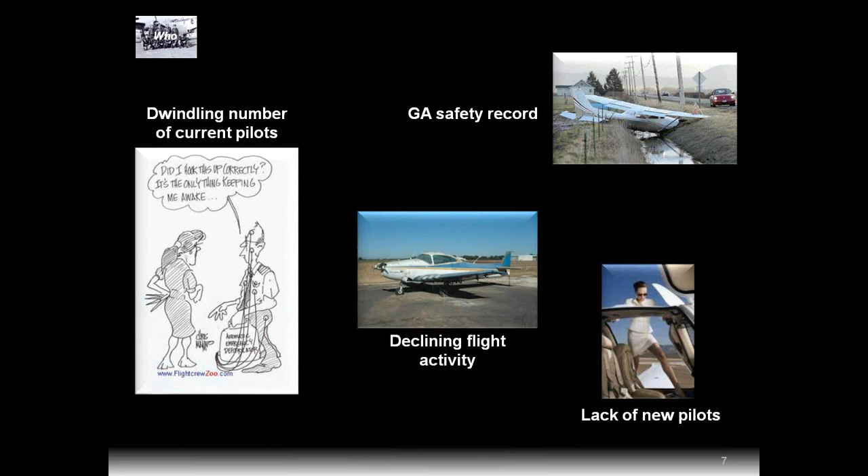Also, a major challenge, we believe, is the dwindling number of current pilots. As you all know, I've been in this game a long time, and a lot of the other folks involved in this have been in aviation a long time, and that just means that we're starting to drop out now for various reasons. And other factors have come into play that have been reducing the pilot population. In fact, I think this cartoon kind of says it all when it comes to the aging pilot population, just not flying as much. We'll look at some numbers here in a second. And of course, the declining flight activity overall in general aviation is a major challenge that we're facing.

The Aerospace Trust has put together a team that's attacking this problem along with the Trust. And part of the team is the FAA Wings program. Also Southern Illinois University Carbondale, as you probably know, they're in the Big 5, if you will, for university aviation programs. They're involved with some aspects of the initiative. Lewis University here in the Chicago area, also in the Big 5 aviation universities. Kishwaukee College, the only junior college in the area that has an aviation program. They're a co-sponsor and one of our partners. The Chicago chapter of Women in Aviation International. Compass Consulting.

Compass Consulting is a team of very experienced aviation experts. The leader of that team is Captain Dave Greenberg. Dave is the former founder and CEO of Cargo 360. That's a 747 cargo operation. Before that, Dave was the Chief Operating Officer of Korean Air, and before that he was Senior VP Flight Ops for Delta, and before that he was a Delta line captain, and before that he was an Air Force instructor pilot.

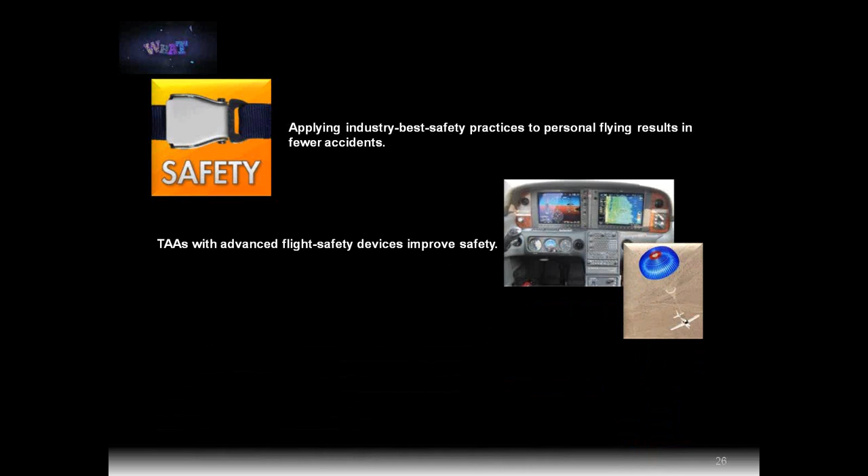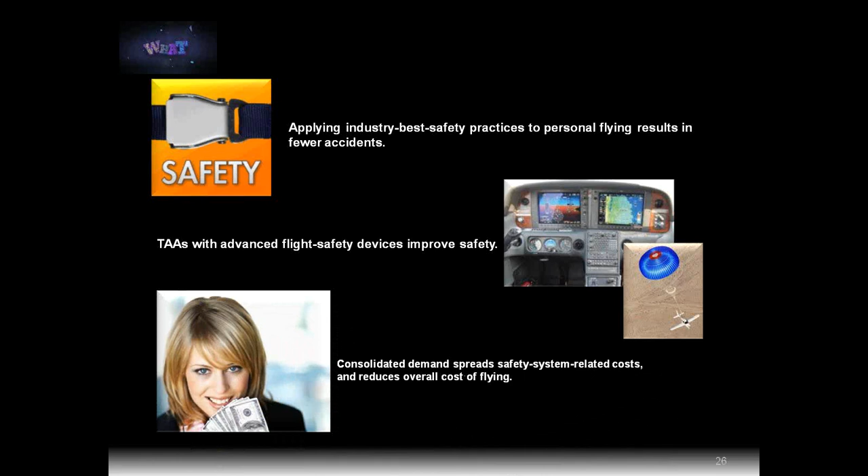Here's what the ADSOD will prove. It'll prove that by applying industry best standards, safety practices to personal flying, we can have many, many fewer accidents, down from that 1,200 a year to just a handful for the people who are flying this way. We believe it will prove that technically advanced aircraft with the advanced flight safety devices will drastically improve safety. We also believe that the ADSOD will prove that consolidating this demand for flying will spread those safety system related costs and reduce the overall cost of flying. So we're going to prove those things, we believe.

We're also going to prove that the number of student starts can be increased to 150,000 a year. Now we're not going to prove that obviously with one ADSOD in Chicago, but when it comes to marketing, if you show that it's scalable, then it's like a test market. So we believe, and we have a lot of marketing guys involved in this, we're all of the same opinion, that if we do this right here in Chicago and document it properly, we'll prove that on a national scale you can get back up to that 150,000 student starts a year.

We also can prove that we can retain 80% instead of losing 80% after they start to learn to fly, and we believe that we can prove that we can turn around the decline in that absolute number of active pilots and make them more active.

But just as importantly, we've got to prove that this ADSOD is a sustainable business model, because you've got to remember the old adage that we've always known about in aviation, especially in personal flying: no bucks equals no Buck Rogers. So this has to work financially. It has to be a sustainable business model.

The FAA isn't going to underwrite it. There's no sugar daddy that I can see that's going to underwrite it. Who could on a national scale? This has got to work as a business model, but we believe it will. So we've got to prove that. All right, let's take a look at the elements of the ADSOD then. What does it really look like?

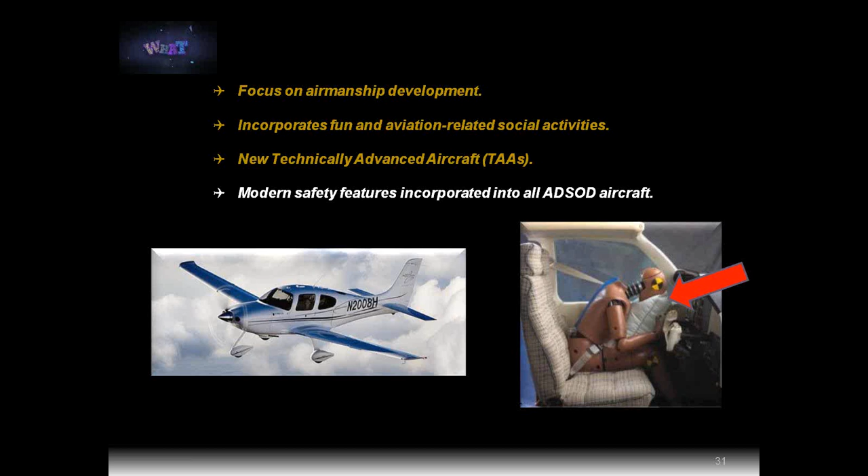So if you're already a pilot like you guys are, and you don't have a lot of tail dragger experience, we'll put you through a tail dragger initial course to where you're good at it, and then you'll have that tail dragger flying in your recurrent training throughout the year, so you maintain those good stick and rudder skills. Otherwise, you'll fly these technically advanced aircraft, Autoflight and all that sort of thing. Every airplane that can have it will have modern safety features like airbags. We'll talk about some of the others.

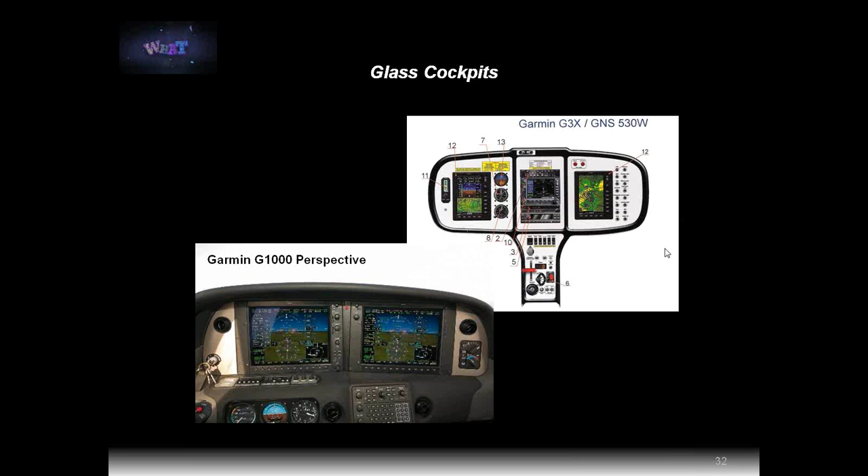All of the airplanes, with the exception of the Champs, the stick and rudder airplanes, as I like to call them, will have glass cockpits. For commonality, we've decided at this point on going Garmin. So in the LSAs, we'll have Garmin G3Xs, and in the Cirrus we'll have the G1000 Perspective system. A lot of commonality in how you operate them and functionality. So it won't be a major hurdle moving between the different airplanes.

All the glass cockpits will have all of the features, so we're not going to cheap out on glass. There are some quote-unquote glass cockpits out there that are essentially EFIS, electronic flight instrumentation systems, that just present the basic six-pack in a different way. But if you really want a glass cockpit, in my opinion, what I call a glass cockpit are systems that have all of these features, like synthetic vision technology.

It looks like the real world out there. XM weather, real-time weather. Terrain awareness warning systems. Traffic alerting systems. I tell you, I flew a corporate airplane, a twin-engine turboprop, Conquest 2, for about 1,500 hours out there in the system. A lot of little airport stuff, of course a lot of controlled airport stuff, but I had a simple Skywatch system in there, traffic alert system, and I felt naked. I feel naked out there without one now.

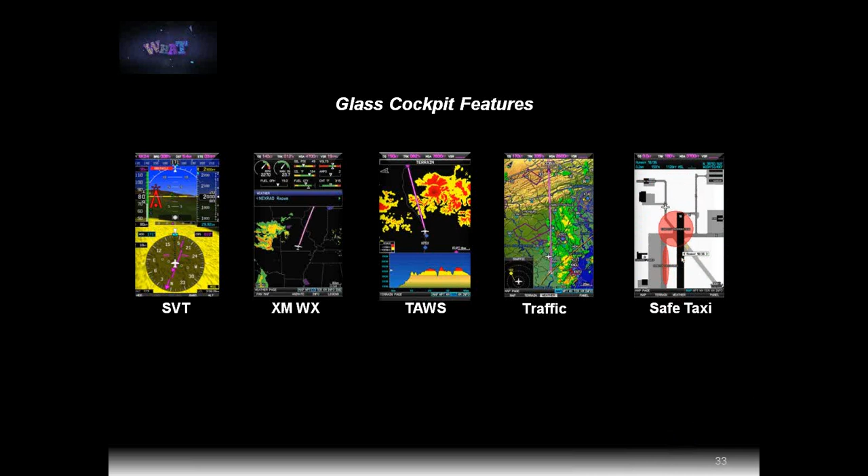They really are an incredible safety enhancing device, and so we'll have them in all the airplanes except for the Champs. And things like SafeTaxi. If you're going to operate at night, especially, or at complex airports or IFR, you've got to have SafeTaxi, but it makes life easier anyhow. So we'll have all these features on the glass cockpits.

You guys have probably heard me mention things like Autoflight. I'm a big believer in Autoflight, as long as you also maintain your stick and rudder skills. But Autoflight is here. It's getting better every day. We're going to see, in my opinion, full auto land within a couple of years. So that means pretty much you keep it going straight with the rudder pedals, rotate with the stick, get it in the air, punch the autopilot on, you fly to where you're going and auto land it. So that's the capability we're going to have.

We have it today from turning on the autopilot right after you get off the ground, till wherever you want to turn it off before landing, usually 50, 100 feet if you want to take it low. So you've got to learn how to do that. You've got to stay proficient in it. But if you do that right, and if you keep your airmanship skills at the proper level in case all this stuff quits on you, or you screw it up, then this makes flying much safer, much more enjoyable, in my opinion, a lot more fun. Not that you can't go do the stick and rudder stuff too, but for the personal getting there kind of flying, this is the way to go, in our opinion.

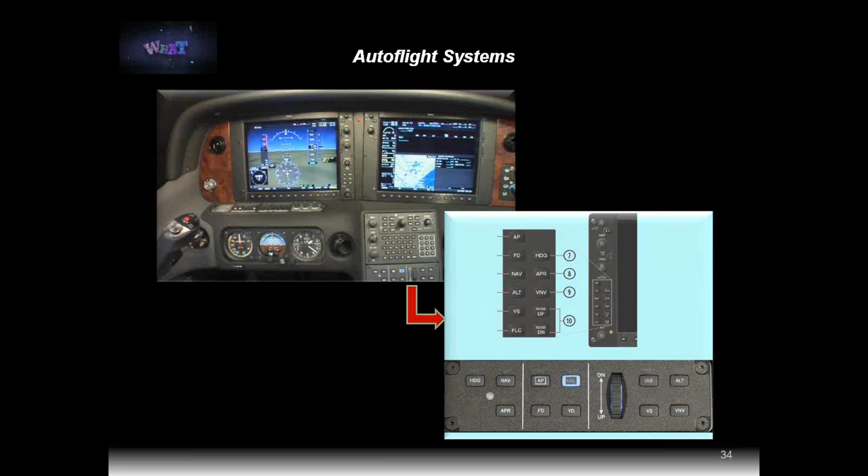Also, for us older guys especially, I think enhanced vision systems are a real boon. We have this in all the Cirruses. They're not available yet on the LSAs, but it won't be long, I don't think. I just was reading where Honeywell's got a blended system now that's not certified yet, will be soon for the upper end guys, where they actually in the glass display blend synthetic vision technology with the enhanced vision technology. So you're looking at the synthetic view, the computer view, overlaid by the infrared view.

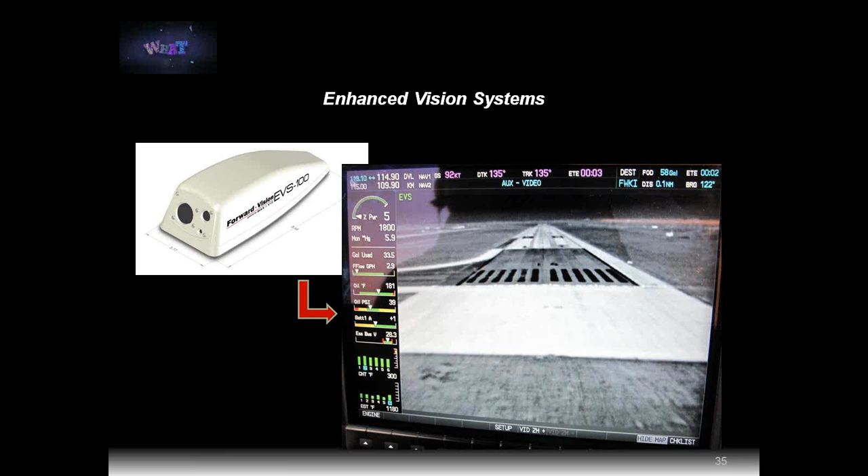So I don't know how you can get any better than that. It's just like, better than looking out the window kind of stuff. And that's right around the corner for all of us. But EVS is here now for the Cirrus.

Also, we'll have all of the advanced flight safety features we've been talking about, like BRS. Initially, we won't have BRS on the Champ, but we will put them on there when we get a big enough fleet. It's an issue for BRS. They want about, I think they told me it was like 35 airplanes for a market before they'll go through the STC process. So once we get enough of them, we'll put parachutes on those airplanes too. But it's not quite as critical on those Champs as it is on the airplanes above that.

So all of the technically advanced aircraft will have parachutes, BRS systems. They'll have satellite tracking systems, which are much better than ELTs, and they afford a lot of other safety enhancing and just operationally enhancing capabilities.

We'll have head-up displays on the aircraft, which again enhances flight safety, airbags on all the airplanes, including the Champs, and all of the traveling airplanes, not the Champs, but the airplanes used for cross-country, the LSAs, the Cirruses, and later on Cirrus jets and other go-in-place airplanes will have sat phones in them, so you can get in-flight support and you have another communications channel in flight.

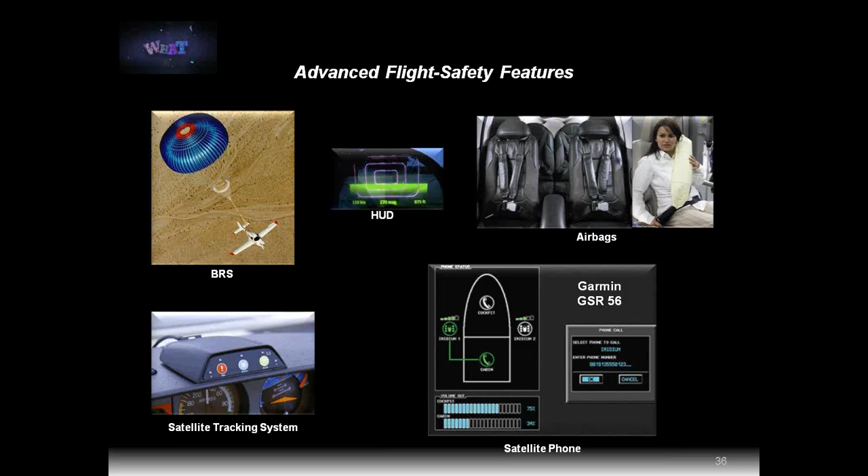Also, the ADSOD will be structured with affordable, quote-unquote, monthly fees. Of course, affordable is in the eye of the beholder. We all know that. But I define affordable as this: as you'll see, we think we can put out brand new airplanes at better prices than old airplanes. So I'd call that affordable. And of course, you can structure it with higher hourly rates and lower monthly fees, or a little bit higher monthly fees, lower hourly rates.

We have chosen to use the good old tried and true Flying Club model. We think that's a much safer business model, and I'll explain that a little bit later. But with that model, you have monthly fees and hourly rates. And again, affordable hourly rates, rental rates on the airplane. Airplanes need to be based, we believe, close to everybody where they live or work. So we're going to have airplanes based at convenient airports in the Chicago area, and I'll do the specifics there in just a little bit.

Also, part of this demonstrator has to be comprehensive airmanship training. Comprehensive. And that's initial training for those people who have not been trained yet, and kind of remedial training for those of us who have learned different ways. We can bring everybody up to the same standard. It has to be comprehensive recurrent training, depending on what your level of experience is, how much you're flying, what kind of flying you're doing. That has a big impact on how often and what kind of recurrent.

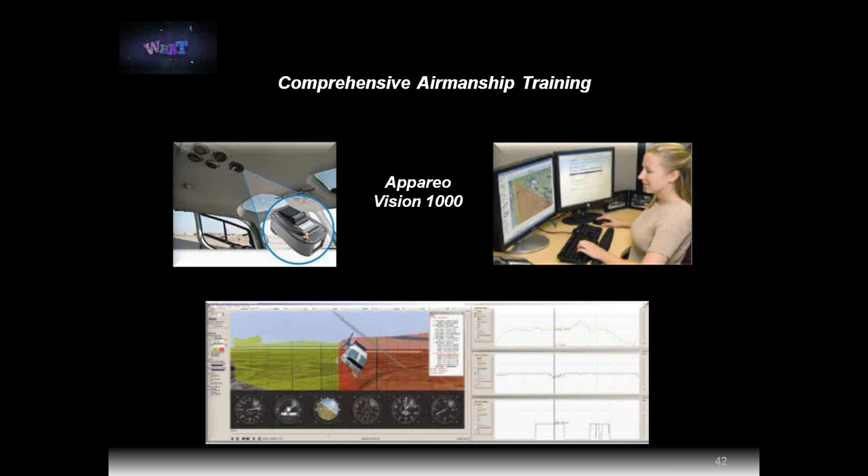You can download that after the flight and view it on a PC, and you can look at what you did, either the video and/or graphic representation. You can see here what all the control instruments are doing while you're doing this, all that sort of thing to support the training. So it helps you to critique your flight, but also a student can take a lesson and then go home and watch that lesson over and over and over. Greatly increases the effectiveness of the training program.

We're also going to, in the Demonstrator, deploy safety culture and safety management system tools, and here are some of the tools. In the safety culture, we'll have safety leadership, like safety officers and the mentor pilots will be leaders in all the safety parts of the safety culture. We'll have performance management, and that's where you're monitoring with the flight data recorders how everybody's flying, what our performance is, and then use that information to make it better, so performance management.

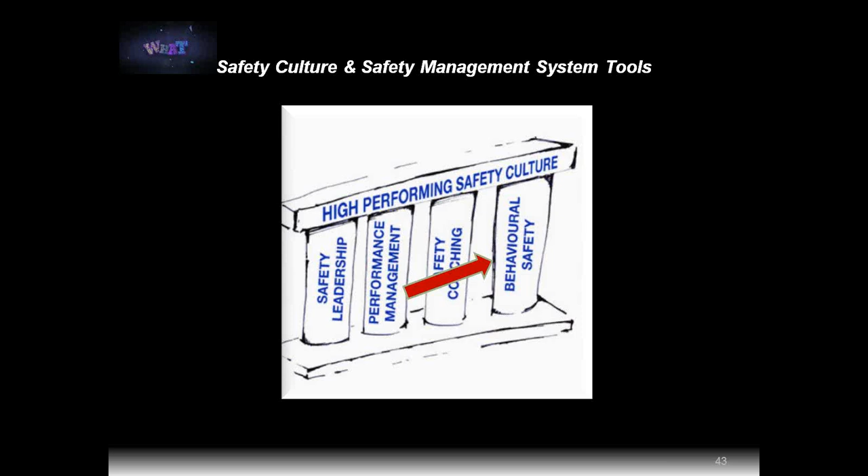Safety coaching, a lot of peer pressure, a lot of talking to each other, sharing information, so we're coaching each other on safety. Again, non-punitive, all coaching. And we're going to dig deep into behavioral safety, because as we know, we're the cause of about 80% of all the accidents. We're doing stupid pilot tricks. It all comes down to behavioral training. And we know how to do it, and it's been working over at the airlines and charter operators. So that's all part of the safety culture.

Here's a quick checklist on the safety culture. For each individual participating in the ADSOD, again, it'll be a personalized program plan for initial and recurrent qualification, so that whatever level that pilot wants to be qualified to fly at, we've designed a personalized program for them, initial and recurrent training, to be qualified and maintain that qualification.

Then a lot of heavy training in human factors. That kind of training has been available in our personal flying sector of the industry, it just hasn't been really pushed yet, hasn't been really incorporated in a system that we can all use. So that'll be part of this. On the organizational side of the safety culture, we'll have effective communications, and a lot of them, using all the new tools. We'll have written standard operating procedures, so we all know how to operate, and these will be accepted procedures by all of us.

Non-punitive policies towards errors. If we make errors, we've got to share that so we can fix the errors and let everybody else know about it, so they hopefully don't make the errors. But we've got to have a system where if I make an error, I feel free to share that error without getting kicked out of the club or penalized somehow, or everybody pointing their finger at me and saying, "Look at that dummy." It has to be non-punitive. And those systems are, again, already in place at airlines and charter operators, so we know how to do that.

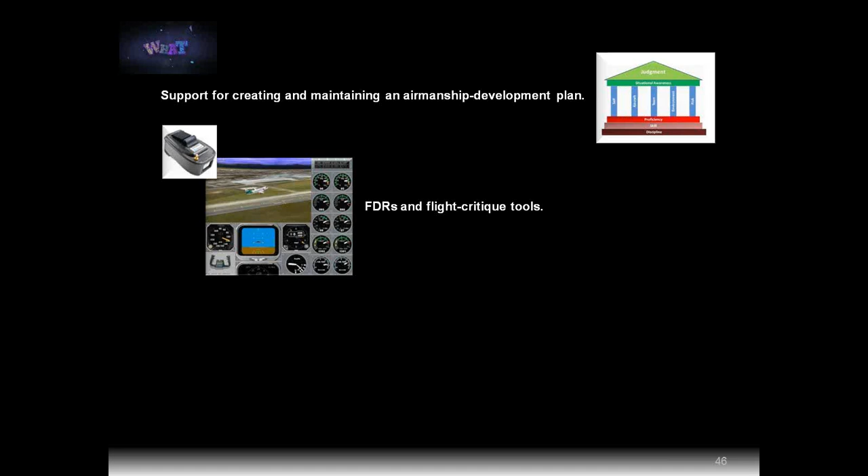And there'll be other tools you can use. So that's part of the ADSOD. Also, those mentor pilots are a tool that you can use. And as I mentioned, we'll have a whole series of airmanship challenges and rewards.

Also part of the Demonstrator, the ADSOD, will be the Flight Operations Support Team, or if you want to think of it as a dispatch center, but also it's a travel service so that it unloads you from all of the details, or as many of the details as you want to unload, of trip planning. So you're going to go someplace, they can handle all your travel arrangements.

The flight planning, dispatch will do your flight plan for you, set up all the arrangements, do all the trade-offs, what's the best way to do it, in consultation with the pilot. And then flight dispatch will help you to make that go, no-go decision, make it in concert with you, and again, they'll file flight plans for you, all that sort of thing.

Then while you're in flight, they'll actively track your flight, actively provide information and support to you if they think you need it, or they'll be available to you anytime you pick up that satellite phone and call. And they're tracking the flight the whole time for safety. In case you go down, they can dispatch somebody immediately.

But also, again, another eye on what's going on with you, with the other eye watching the big picture on weather or NOTAMs or all those kinds of things. So they have the big picture for you. Got your back. In-flight support, with providing you with that information or responding to your request for change of rental car at the destination, FBO, you're going to change airports, all that sort of thing. And they can manage all that trip details for you. So, extensive flight operations support team.

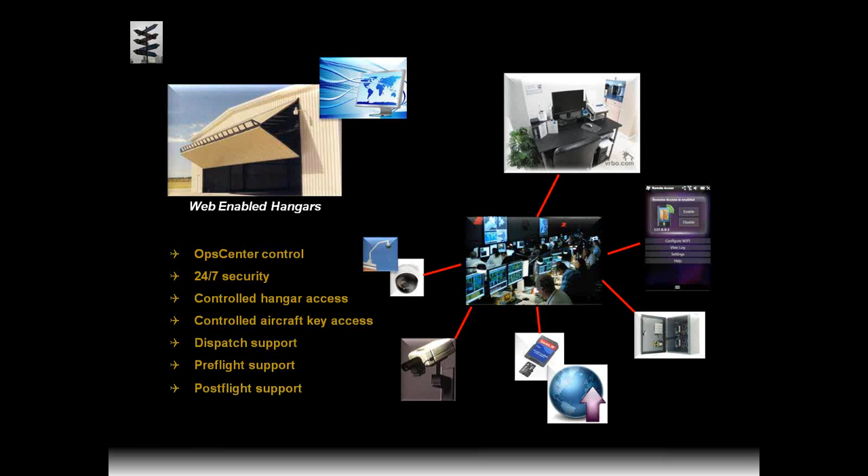So now let's talk about when. When is this going to happen? And you might ask yourself, will it be when galaxies collide, or maybe when pigs fly? Well, actually, it's right now. We're at the stage where we are ready to take applications from folks who want to participate in this. So it is happening. We plan over the next 4 months, 120 days, to select the participants for this demonstrator.

Then during that time, we'll be getting the aircraft and facilities lined up. We're already in that process, so that once we have those 140 participants who have committed to the ADSOD, not financially at that point, just applied and been accepted to participate, no money involved, then we'll tell everybody, okay, are you in or not? Everybody pays their first month fee and purchases their first 4 hours of flight time, which you'll see in a minute as a requirement, and away we go.

So best case, we believe we can go live with the system I just described by May 1st. Maybe not every single element of the system on May 1, but pretty close, and then we'll spool it up the rest of the way very quickly. So how are we going to do that? Here's the business model. Quick and dirty.

I mentioned 140 participants. Roughly, as we see it, about 40 of them will be guys like you, current pilots who want to participate in this, be part of it. Now we're going to go out and round up 100 new people, folks that want to learn to fly, who want to be personal flyers, want brand new people. So that's 140. Each participant then commits to pay that monthly fee. So if you're flying the 20, it's $199. Flight Design or the LSA is $99. 22, it's $259 a month.

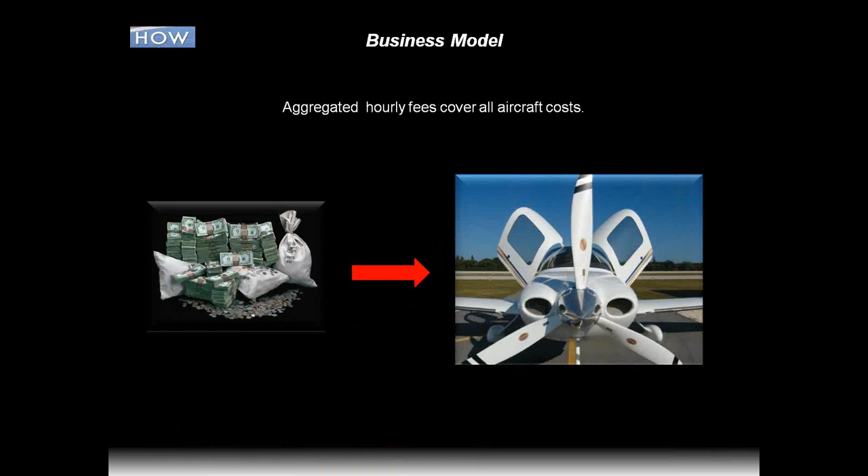We've got all of our overhead covered, so even if the airplanes don't move, we've got our support services and overhead covered. Then each airplane is covered fully by the hourly fees paid for the airplanes. Keep in mind, everybody's committed to buy at least 4 hours a month. So here's how that looks. 4 hours per month per individual, times 10 people per airplane, is 40 hours per month per airplane. That fully covers the airplane. I'll show you.

This is an example: the CTLS. 10 people, 4 hours, 40 hours a month. They're going to pay $99 an hour. That means we're going to bring in $3,960 a month for those 40 hours. Well, here's what it costs to operate the airplane. The payment on the airplane is $1,340 a month, insurance $580, hangar $650, and those 40 hours direct operating cost, that's $1,360, so it's $3,930.

That's just under what we're going to take in. So we made it that way, obviously. That's how we came up with that hourly rate. Nobody's going to get rich, but we got everything covered, and that was the idea. 10 people, one airplane, 10 people paying their monthly. They cover the overhead and the op center support required for those 10 people. Everything's covered. A good, solid, safe, sustainable business model.

But the leaseback deals are not your father's leaseback deal. If you've ever done a leaseback deal, you probably told yourself you'll never do it again. Everybody I've ever talked to said they'll never do another leaseback deal if they've done one, because no leaseback deals are guaranteed. So you put your airplane in it, get spotty results, take in a little money, never enough to cover the airplane. On our leaseback deals, everything's covered. It's guaranteed. Everything I've shown you up here is guaranteed.